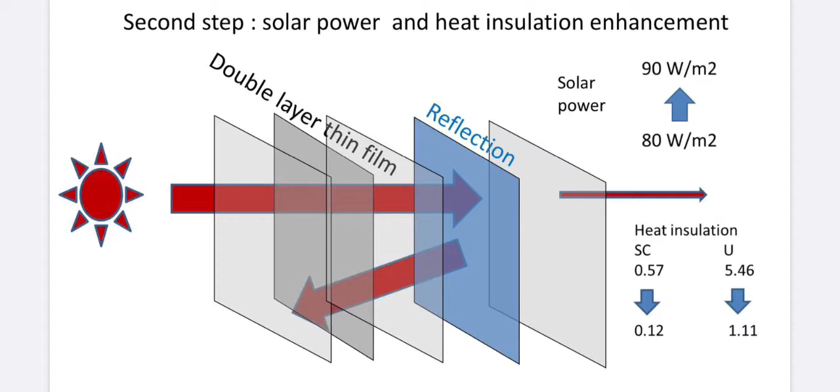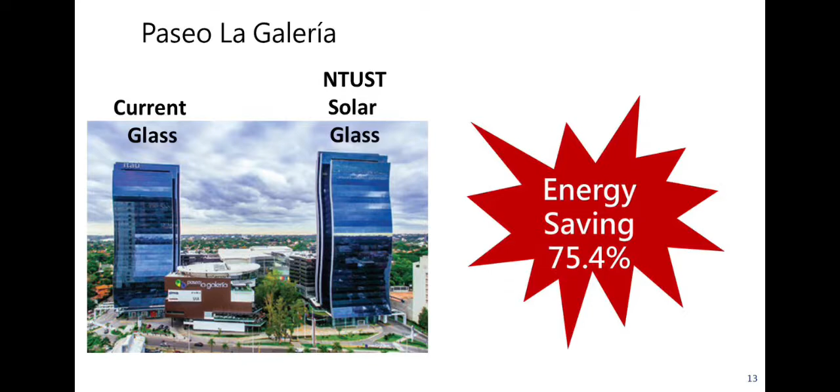Why can the glass generate a lot of solar power? Because we set up a semiconductor inside the glass, and we also set up a very good insulation function inside the glass. For example, when we apply it on the Galería, compared with the current glass, it can save 75% electricity.

Good morning, everyone. Team 1 are students from UPTP. They will do the test of solar glass applied on skylights and windows in Paraguay.

Hello everyone and welcome to our forum. Today, my classmates and I will discuss our research on the topic of renewable energy in Paraguay, and more precisely, on the introduction to our country of NTUST heat insulation solar glass. Professor Xin Huaiyong is our research advisor, and Janina Monjes and I, Eric Striving, will discuss the results of our learning and testing throughout this semester.

On behalf of all students of the UPTP that worked on this project, I would like to briefly outline our aspirations. First of all, to learn about renewable energy through experimentation. Then, to expose Paraguay's potential for a more widespread adoption of solar power generation techniques. And finally, to hopefully inspire change in our country by ourselves someday.

The application of photovoltaic modules on buildings. What makes heat insulation solar glass different? There is one key difference between traditional crystalline solar panels and solar glass, and that is transparency.

Heat insulation solar glass is produced by applying a coating layer of semiconductor to the base glass instead of cutting solid silicon ingots. This allows for various degrees of transparency the more silicon is cut, and gives solar glass the ability to serve different purposes, to be applied on buildings, in skylights or windows, rather than just on roofs, as traditional crystalline solar panels would be.

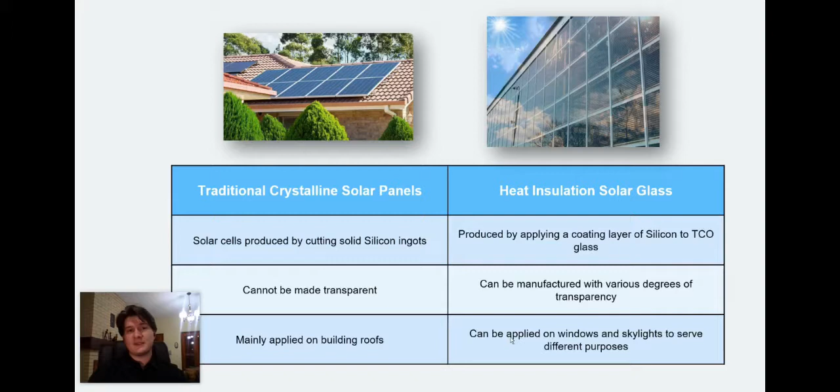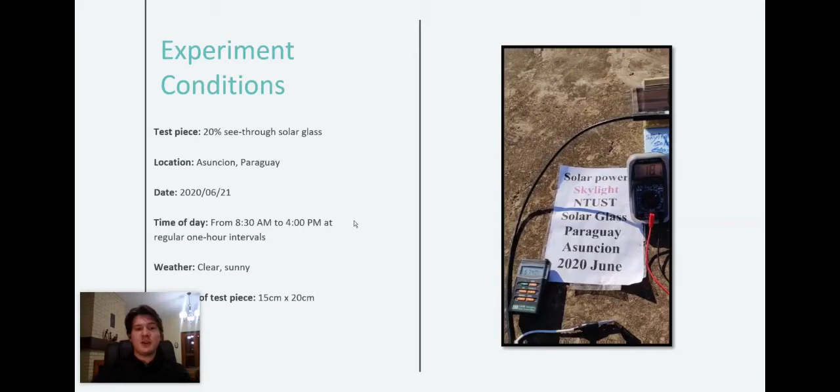So now I will walk you through the first of two tests my research team and I conducted, this one being focused on the application on skylights of 20% transparency heat insulation solar glass. The experiment consisted of, on a sunny day, measuring sun intensity and the corresponding current and voltage output of a 20% see-through test piece at regular 1-hour intervals.

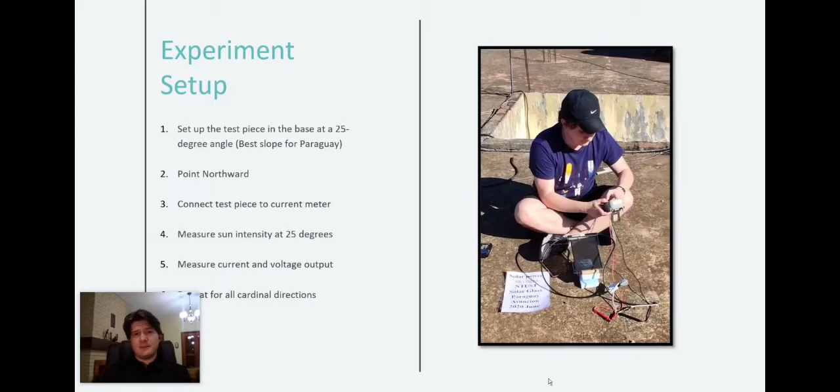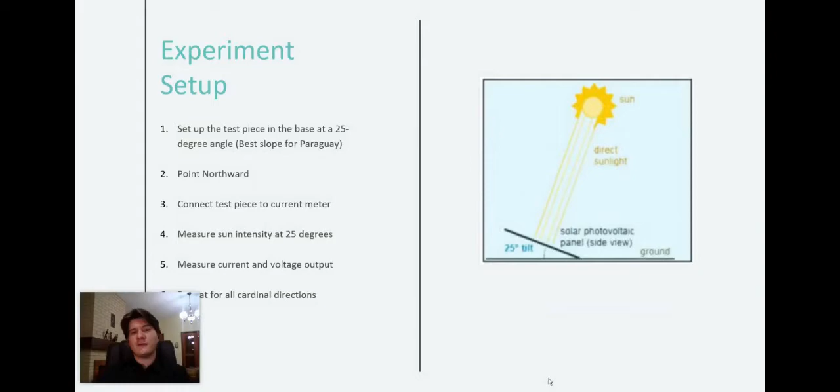We tested from 8:30 a.m. to 4 p.m., covering the hours of effective sunlight to get an idea of how solar power generation changes throughout the day and in which direction solar panels should be aimed in our country. The experiment was set up as follows: setting the test piece at a 25-degree angle, which is the best slope for solar power generation in Paraguay, pointing northward and measuring current and voltage. This process was repeated for all 4 cardinal directions every hour.

Here we have the highest measurements we obtained, which unsurprisingly came at 12 p.m. while pointing northward, when the sun is highest in the sky. We have here some examples of the experiment setup and the measurements we took.

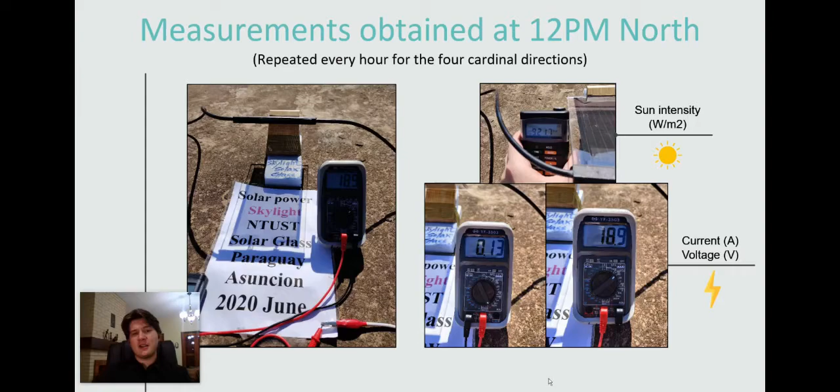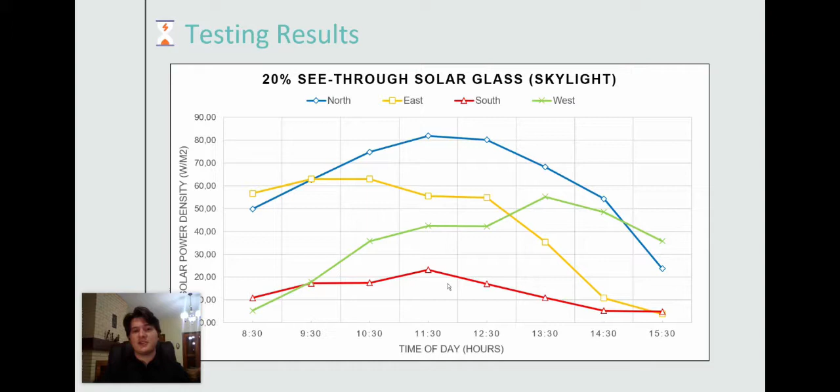Analyzing the results obtained from this test leads to the following conclusion. When installing photovoltaic modules in Paraguay, the best direction to point them in is north because they produce the highest average power output level.

Now, as a personal conclusion to my learning of this subject, I will add that solar power calculation is easily done through specialized software that helps one pick the right parameters for installation. This can really be done by anyone, and I say it so as to encourage the adoption of renewable energy sources in our country.

And finally, to leave you with the core message of this presentation, power generation, when done with the environment in mind, will put us in the right path to change our current climate situation. So I hope this proves to be a new option for Paraguayans to adopt.

Thank you. I'm Janina Monjes. I'm also a civil engineering student, and I'm going to explain a little bit about the differences between the 50% and 20% see-through heat insulation solar glass.

To fully understand the difference between these types of solar glass, it's very important to mention the production process. During this process, a piece of TCO glass receives a layer of semiconductor, in this case silicon, and right after that, by means of a laser inscriber, it receives consecutive line-shaped grooves.

The only difference between the 50% and the 20% see-through solar glass is that the 50% see-through receives a greater amount of grooves, and for that reason it ends up allowing a greater amount of light to pass through the glass. The opposite happens with the 20% see-through solar glass.

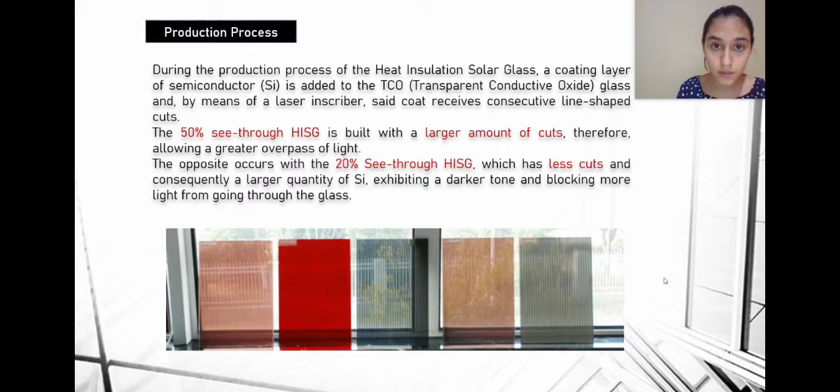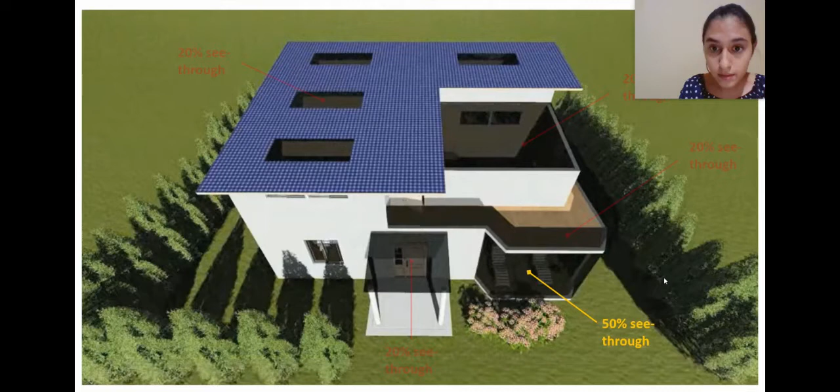With respect to the application, the 50% see-through is mainly applied on windows because of its transparency levels, and the 20% see-through solar glass is mostly applied on skylights because it allows a minimum amount of light to pass through the glass and also helps to save resources that otherwise, with a normal roof, would have been invested in lighting systems. Here we can see the 50% see-through on windows and 20% see-through solar glass on skylights, as I mentioned before.

And with respect to the testing process, I highlighted some points about the procedure. The first one is to set the solar glass at a proper slope. Because we are imitating the position of a window, we set it at 90 degrees from the horizontal, then we configure the multimeter to measure the current and the voltage. We also use a solar intensity meter to record the sun intensity of that day. We measure the current, voltage and sun intensity at each cardinal direction and repeat the whole procedure every 1 hour.

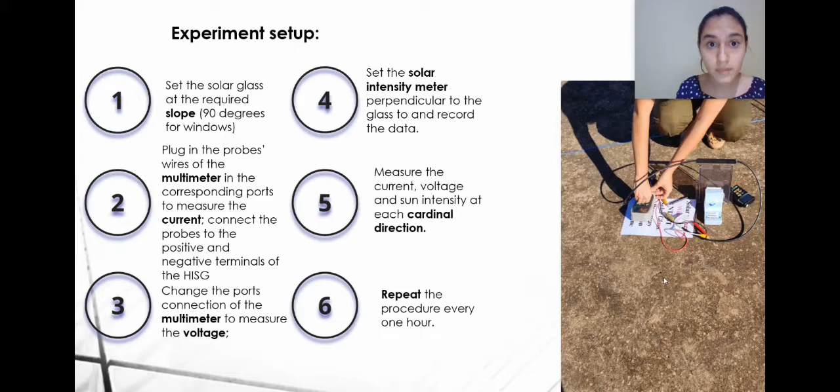Here are some pictures of the procedure. At the left-hand side, we can see the multimeter measuring the voltage and also the sun intensity meter right here. And at the right-hand side, the multimeter measuring the current.

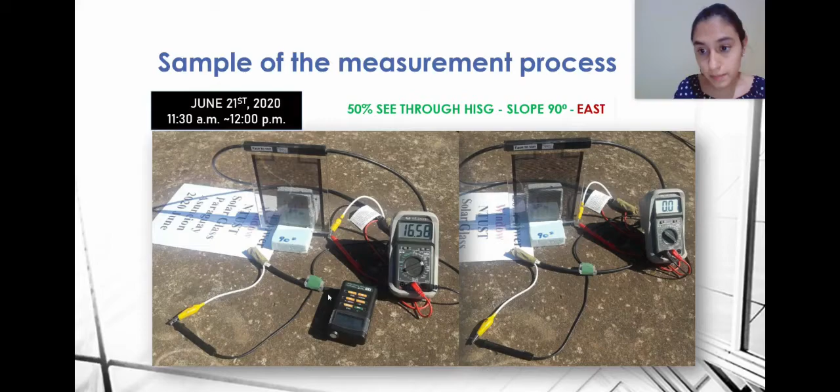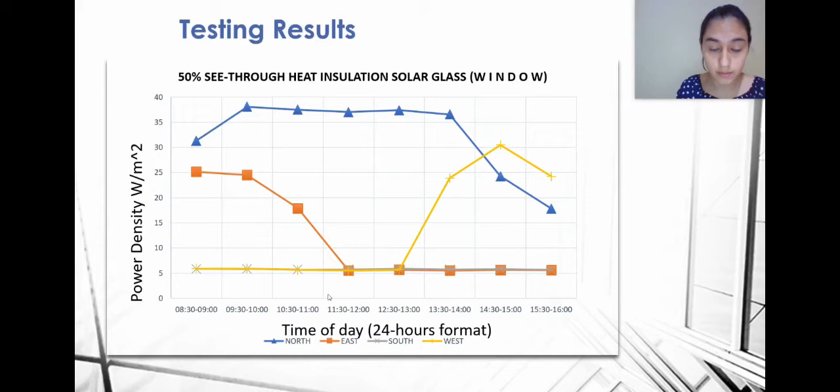We ended up with this graph, which shows that the higher amount of power density was generated when the solar glass was facing north. Here, comparing the results of the 50% and the 20% see-through, we can observe that in all the cardinal directions, the 50% see-through shows lower levels of power generation.

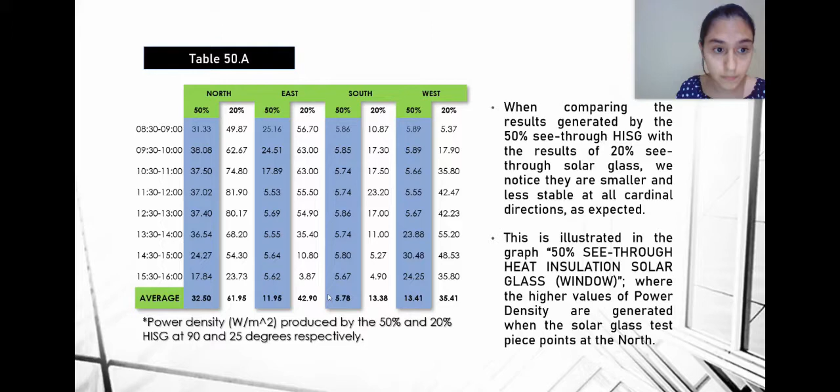because as I said before, it can be used for skylights, windows, also balcony barriers, and more places just by taking care of selecting a proper percentage of transparency. Also, it offers the reduction of climatization and lighting system expenses because of its insulation and transparency properties. And with respect to the aesthetics, it offers a clean, good-looking, and modern appearance. So it's not only a source of power generation, it's indeed a very convenient construction material.

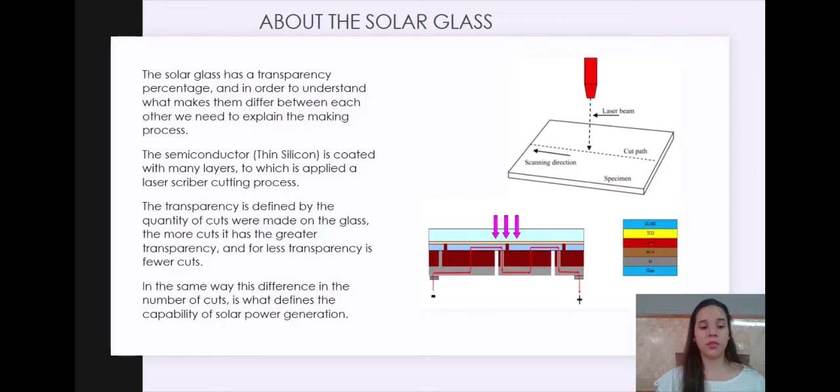The solar glass has a transparency percentage, and in order to understand what makes them different from each other, we need to explain the making process. The semiconductor, thin silicon, is coated with many layers, to which a laser scriber cutting process is applied. The transparency is defined by the quantity of cuts made on the glass. The more cuts it has, the greater the transparency, and less transparency means fewer cuts. In the same way, this difference in the number of cuts is what defines the capability of solar power generation.

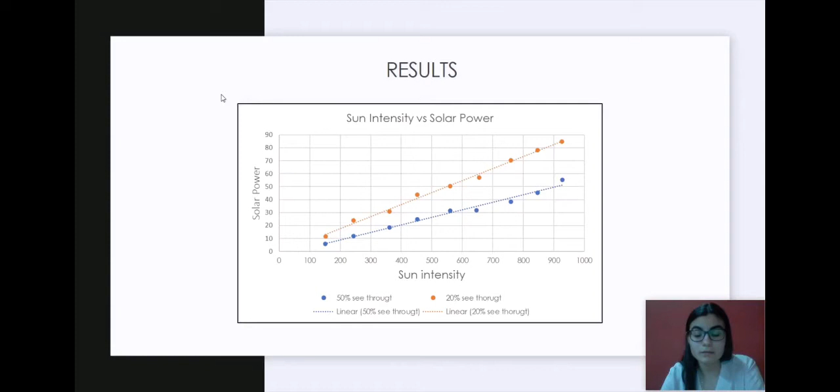To express the results, we display the gathered data in a graph of sun intensity versus solar power, and it's clear that the 20% see-through solar glass has higher solar power generation than the 50% see-through solar glass. The 50% see-through solar glass is in blue and the 20% see-through solar glass is in orange. So that's all, and thank you very much for your attention.

Team 3 will do the heat insulation test for you, and they will tell you the insulation efficiency of the solar glass. Heat insulation efficiency of NTUST solar glass in Paraguay, by Manuel Pasmore and Joaquin Maldonado, Team 3. The NTUST solar glass you have seen before has the property of being a high power generator and also a good heat insulator.

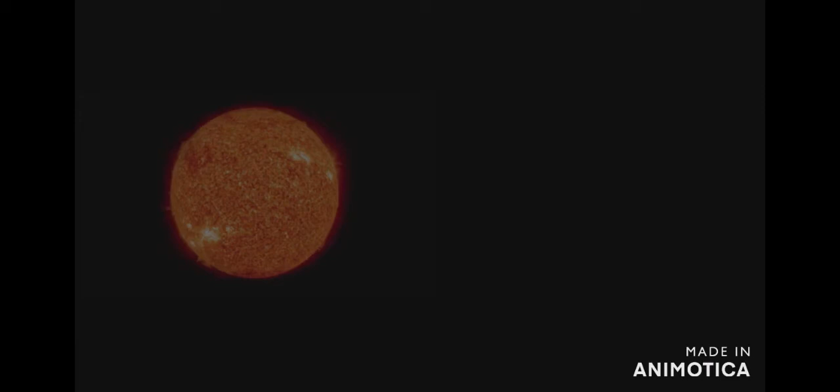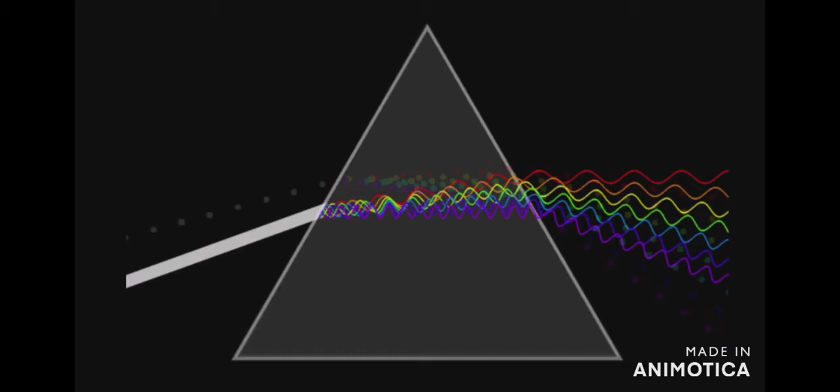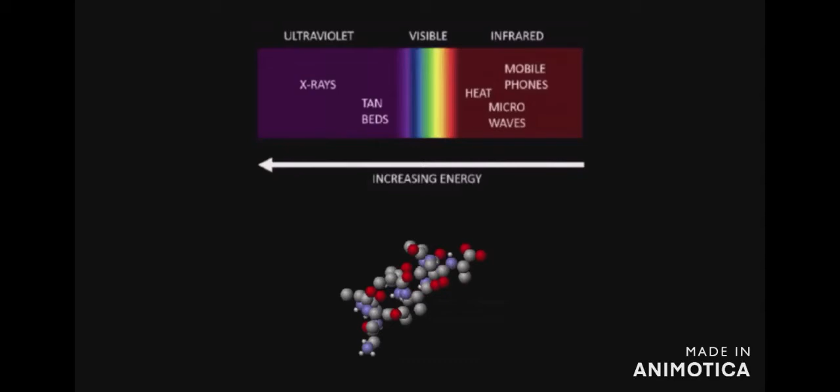But first, how exactly does solar heat work? The solar heat we all know is derived from solar energy. This energy travels from the sun as light particles called photons. These particles have different levels of energy and different wavelengths. However, all photons, especially low-energy infrared photons, can cause objects to heat up due to an increase in the kinetic energy of the molecules. But how can the glass use solar energy to produce solar power? Let's look at the heat insulation solar glass closer.

To explain how this solar glass works: it was first developed in 2009, made out of a thin semiconductor film covered by a double glass layer of 4 millimeters on each side. It produces around 80 watts per square meter. By 2012, the second generation of the solar glass was developed, and this time it had 2 extra layers. It has an infrared reflection film with a gap of 6 millimeters on each side, and at the back another layer of glass of 6 millimeters. This time it produces 102 watts per square meter.

The test that you will see here is the test that we performed with the help of Professor Young. We measured the sun intensity on the front of the glass and at the back of the glass. The results we got for the first and second generation were the following. For the first generation solar glass, on the first attempt we got 84% heat efficiency, while for the second generation on the first attempt it was 96%. On the second attempt, for the first generation we got 85%, while for the second generation it was 96%. Thank you very much.

In addition, depending on the customer's need, a shading factor can be added, where the more shading in the glass is, the higher the energy produced by it, and also the greater the thermal insulation is. In comparison, a normal glass with a 50% see-through has only 40% heat insulation. While the HISG, the Professor Young invention, with a 50, 20, or even a 10% see-through solar glass, can absorb up to 89, 91, and 90% of the heat respectively.

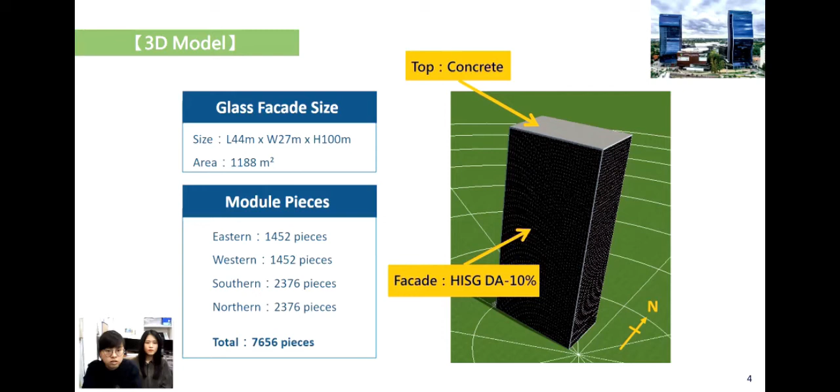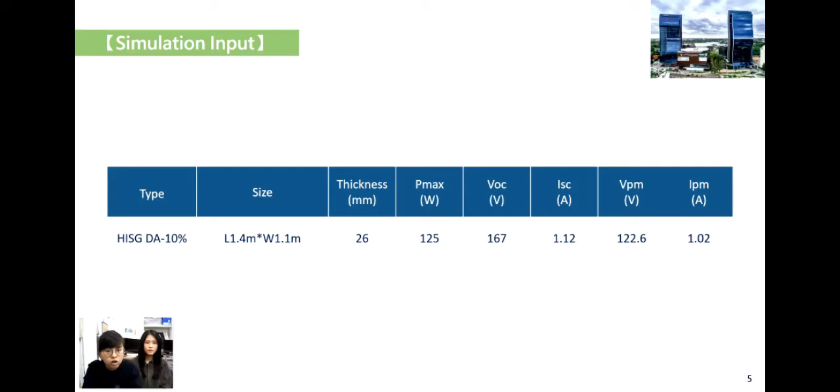First is solar power generation. This is our model. Glass facade size is 44 meters long, 27 meters wide, and 100 meters high. We use modules on 4 facades, total 7,656 pieces. And on the top, we use concrete material. This is the electrical value we input. Per module size is 1.4 meters long and 1.1 meters wide. Maximum power is 125 watts. We use PVsyst to simulate, and we found that the building using HISG DA 10% can generate 620,000 kilowatt-hours per year of solar power.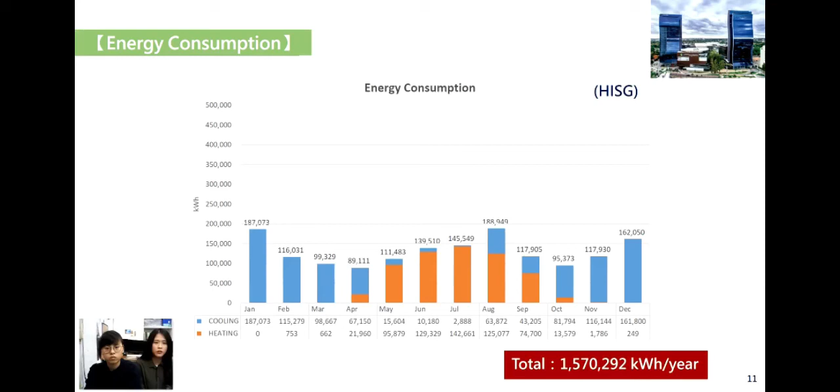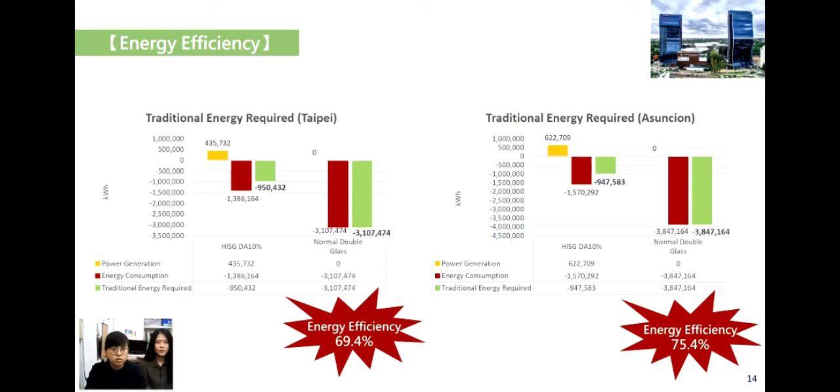This is energy efficiency comparison. Left is Taipei; energy efficiency is 69%. And right is Asunción; energy efficiency is 75%. And we can find that energy efficiency of Asunción is better than Taipei. One of the reasons is that Asunción receives more sunshine and generates more solar power.